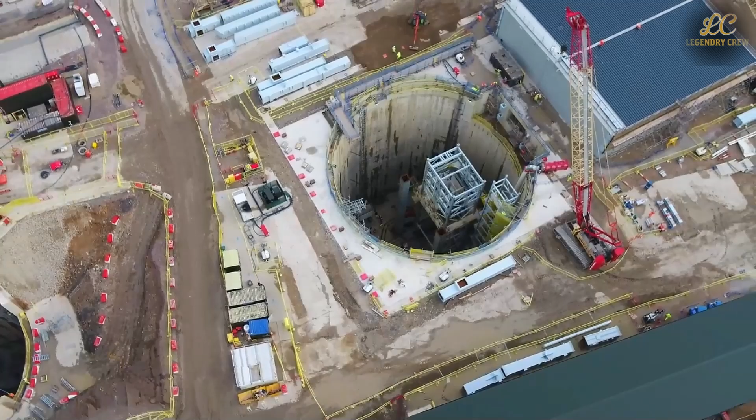Then, almost unnoticed by the public, a project appeared that promised to do something unfashionable but very concrete: dig something out of the ground and sell it to the world. Not shale gas, not lithium hype, not some speculative green miracle, but a mineral most people had never heard of, pulled from almost a mile beneath a national park.

The pitch was simple and deliberately dramatic. This single resource, polyhalite, could add the equivalent of roughly $130 billion to the British economy over the next half-century. That number was not whispered by activists or bloggers, but repeated by the companies and agencies backing the project. It was framed as a quiet economic reset, a long-duration export engine, and a rare example of Britain still playing the heavy industry game on a global scale.

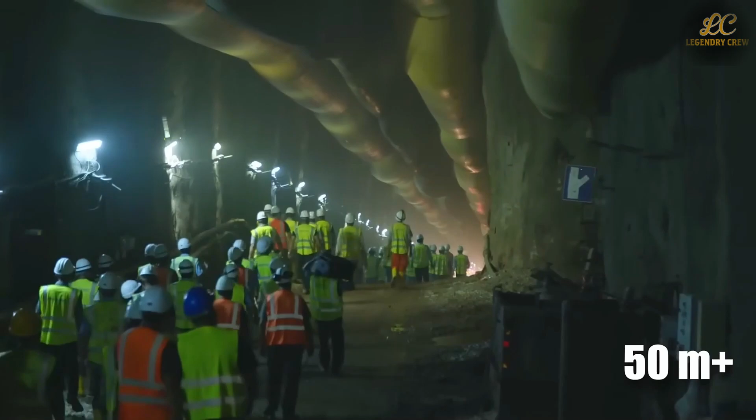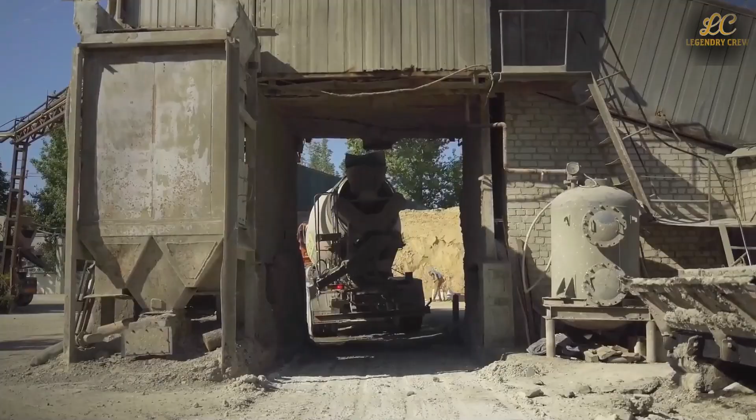The twist was that almost no one could see it happening. Drive through the countryside near Whitby in North Yorkshire, and you would not pass steel towers, truck convoys, or the usual visual clutter of a major mine. Instead, you would see fields, hedgerows, and a few barn-like buildings that look as if they belong to a farming cooperative. That is the point.

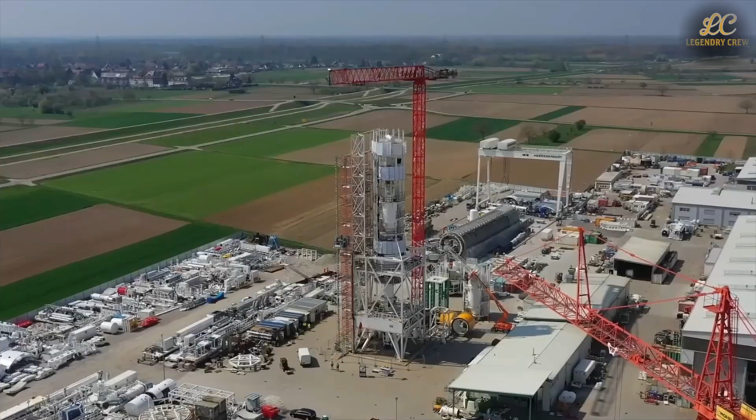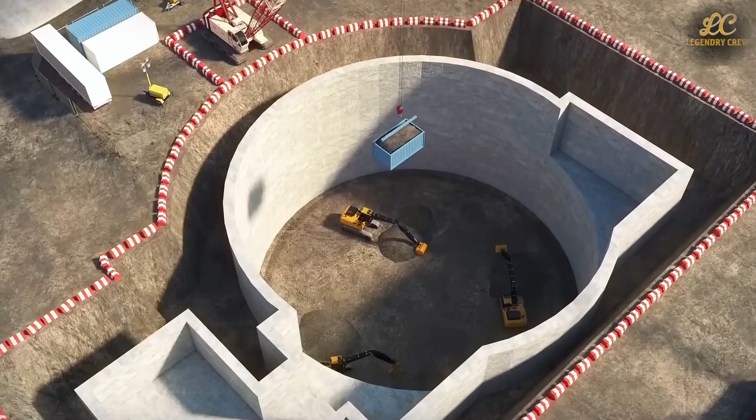The Woodsmith Project, as it is formally known, sits inside the North York Moors National Park, one of the most tightly protected landscapes in England. The deal with regulators and local communities was blunt. If you want to build a mine here, you hide it. Almost everything happens far below ground, deeper than any mine in Europe.

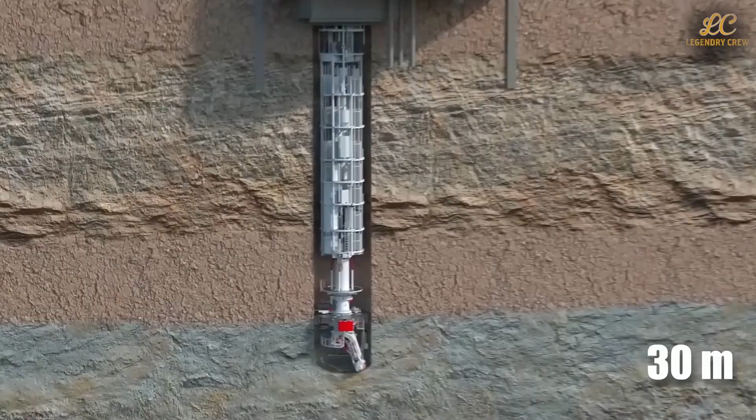This is where the narrative becomes deliberately provocative. Britain, a country often accused of exporting pollution while outsourcing production, is quietly building one of the deepest and most complex mines on the continent and marketing it as low impact. The infrastructure that usually signals extraction, the noise, the traffic, the concrete, has been pushed underground. The project's supporters call it responsible mining. Critics call it clever optics. Both can be true.

At the center of the story is polyhalite itself. Unlike oil or gas, it does not promise quick profits or geopolitical leverage. It promises something less glamorous, but more stable: fertilizer. In a world where food security and agricultural inputs are under constant pressure, that alone is enough to get policymakers interested. The mineral contains potassium, sulfur, magnesium, calcium, and trace nutrients in a single naturally occurring package. It does not need chemical conversion to be useful. Crush it, granulate it, ship it.

That simplicity is repeatedly emphasized because it underpins the project's main selling points: lower processing emissions and a product that fits neatly into the growing market for natural inputs. From the start, the Woodsmith mine was framed not as a local curiosity, but as a long-term national asset. Its backers talked about 50-year horizons, global markets, and steady export flows rather than boom and bust cycles.

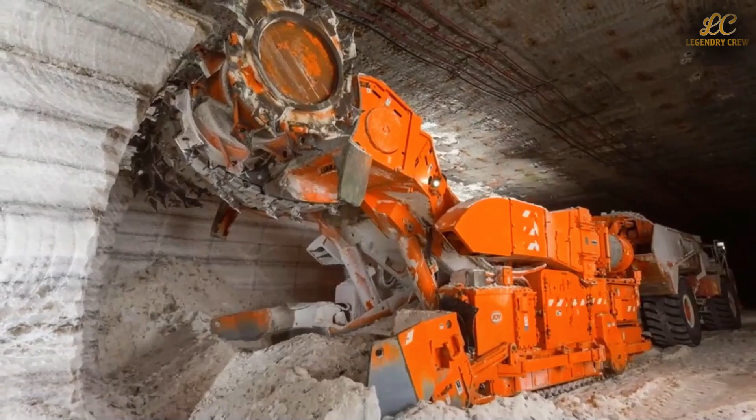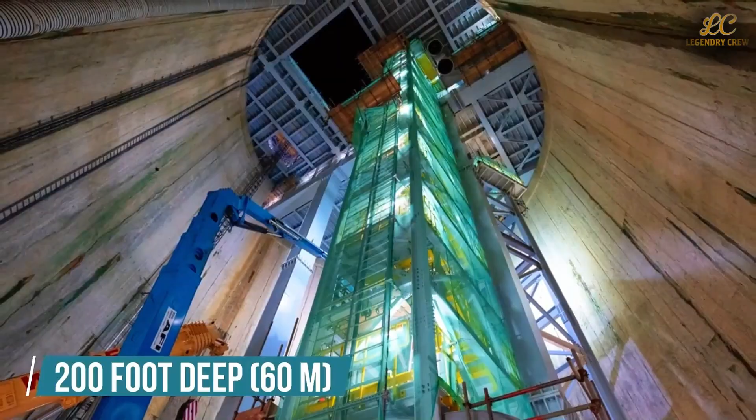The implication was clear. Britain might argue endlessly about services versus manufacturing, but here was a reminder that geology still matters. Sometimes, the most disruptive economic story is not a new app or financial instrument, but a hole drilled deep enough to change what a country sells to the rest of the world.

Polyhalite sounds obscure because, until recently, it was. For decades, global fertilizer markets revolved around a familiar trio: nitrogen, phosphorus, and potassium, usually processed through energy-intensive chemical routes. Polyhalite does not fit neatly into that model. It is a naturally occurring evaporite mineral that already contains potassium, sulfur, magnesium, calcium, and multiple micronutrients in one crystal structure. There is no need to synthesize or chemically recombine its components. Once mined, it is crushed and granulated, then sold largely as is.

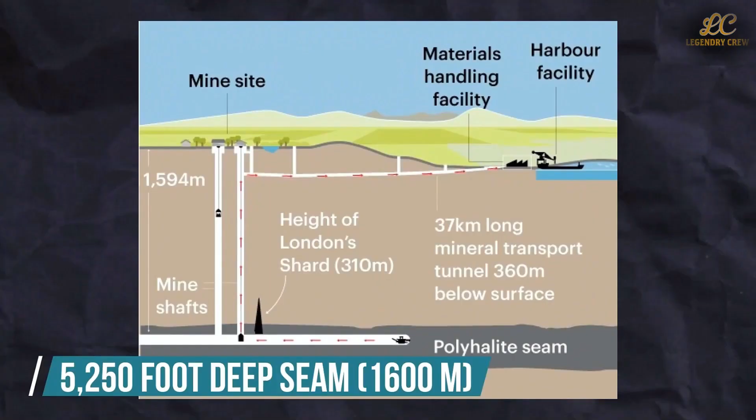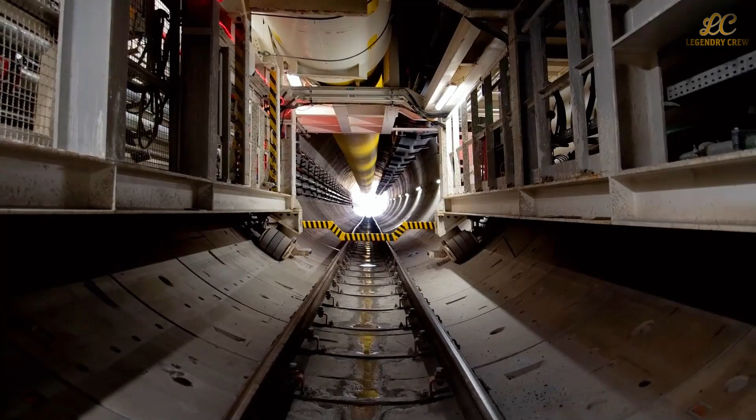That single fact explains most of the enthusiasm surrounding the Woodsmith project and also much of the skepticism. Supporters frame polyhalite as the anti-fertilizer fertilizer. Traditional products often depend on fossil fuels, especially natural gas, and leave behind soil damage over time. Polyhalite, they argue, feeds crops more slowly, improves soil structure, and avoids the chemical shock associated with conventional inputs. The marketing pitch goes even further.

Crops grown with it can, in many jurisdictions, be labeled as organic compatible. For farmers facing consumer pressure and regulatory scrutiny, that is not a minor detail. It is a potential pricing advantage.

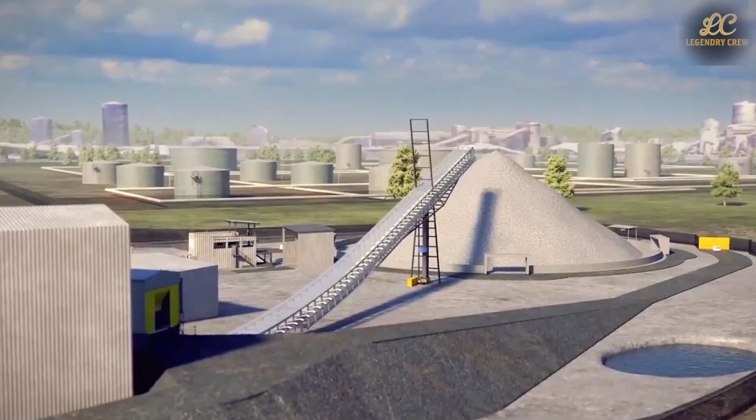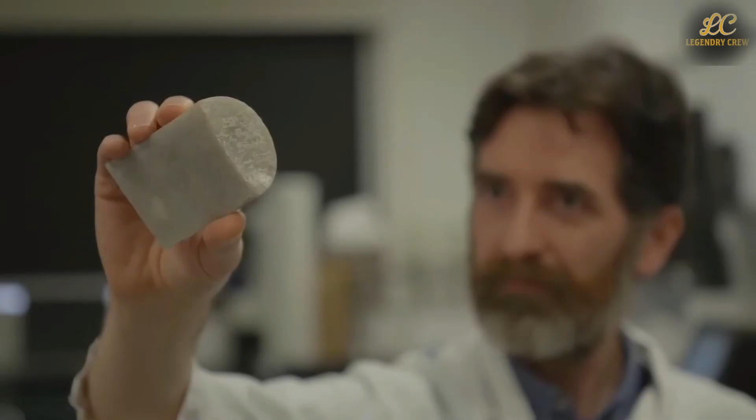Anglo American, the company now in charge of the project, brands its polyhalite product as Poly4. The name is blunt, almost industrial, and intentionally avoids green poetry. The message is that this is not a miracle substance, but a practical one. Same price range as standard fertilizers, fewer environmental headaches, and simpler logistics. In fertilizer markets, where margins are thin and volumes are massive, good enough and reliable often beats revolutionary. Still, the claims deserve scrutiny.

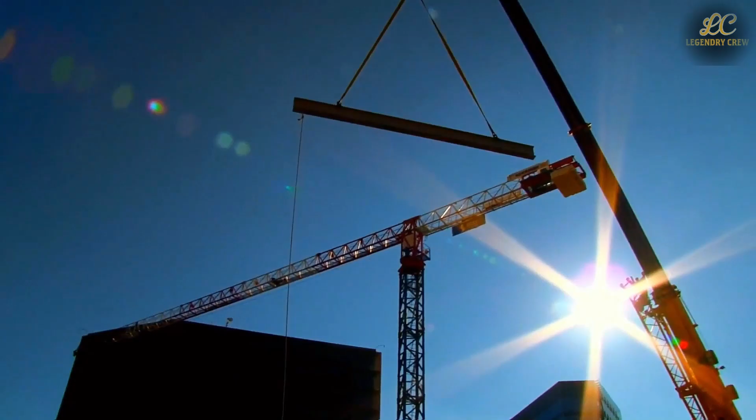Fertilizer demand is global, but it is also brutally competitive. Potash producers in Canada, Russia, and Belarus dominate supply chains, and farmers are famously conservative buyers. They do not switch inputs because of branding. They switch when yields, cost, and reliability line up.

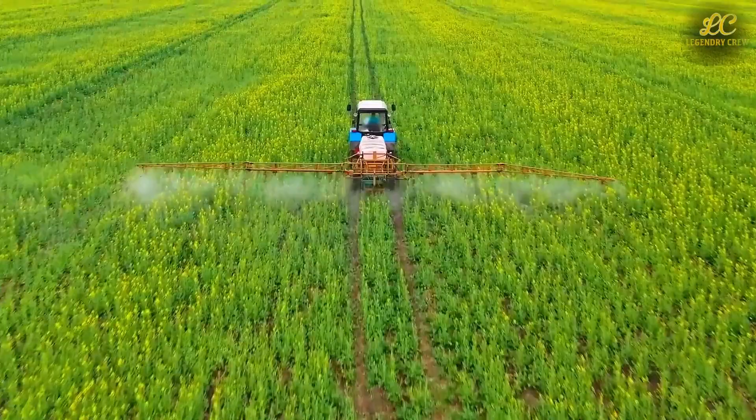Polyhalite has shown promising results in trials, particularly for high-value crops, but it is not a universal replacement. It works best as part of a nutrient mix, not a silver bullet. That nuance rarely makes headlines, but it matters for long-term adoption.

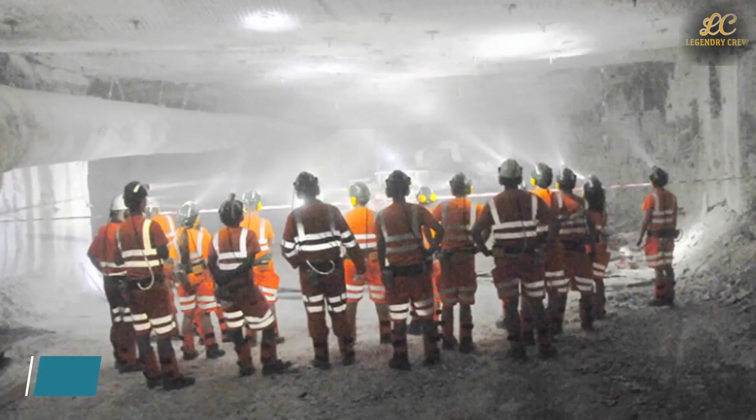This is where the Woodsmith narrative becomes more strategic than scientific. The project is not betting on polyhalite replacing existing fertilizers overnight. It is betting on incremental substitution at scale. Even capturing a small percentage of global fertilizer demand translates into millions of tons per year. For a mine designed to operate for generations, that slow burn is not a flaw. It is the plan.

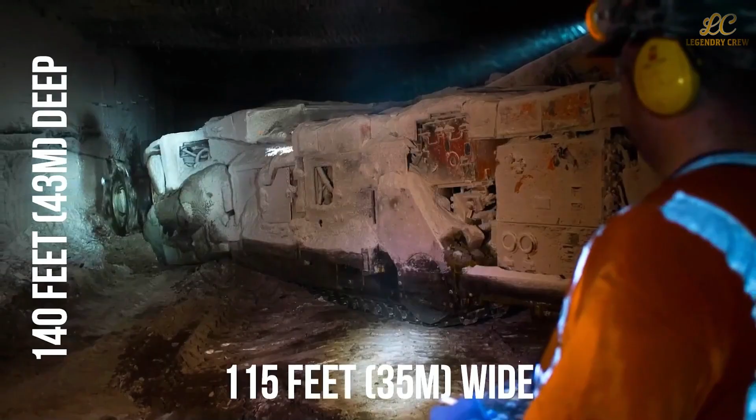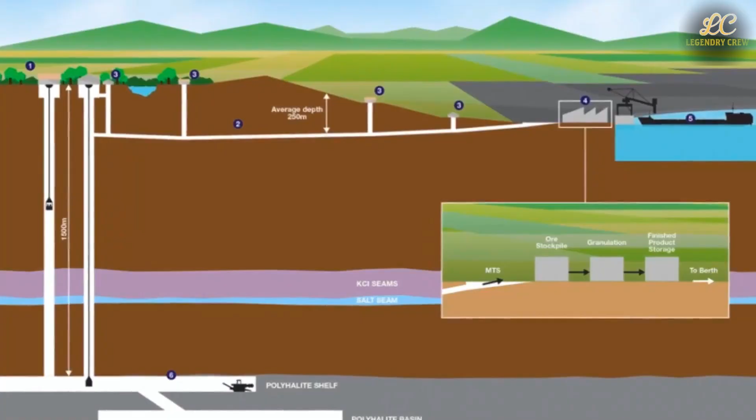There is also a geopolitical undertone that rarely gets stated directly. Fertilizer markets are sensitive to sanctions, wars, and trade disruptions. Recent years have reminded governments that food supply chains are not immune to politics. A large, stable, domestically controlled source of multi-nutrient fertilizer fits neatly into the language of resilience and strategic autonomy. Britain may no longer talk about empire, but it still understands leverage when it sees it.

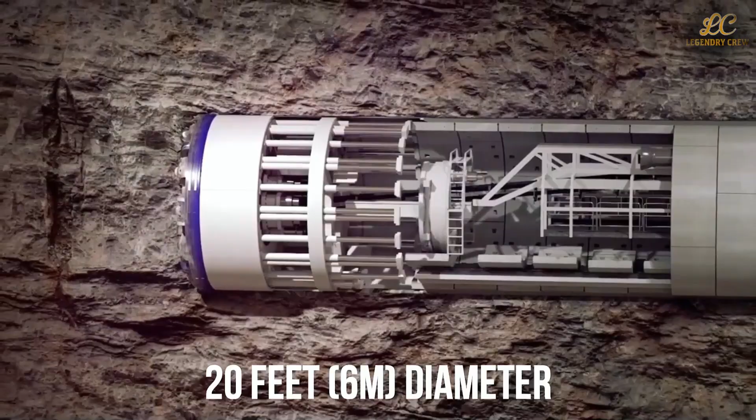The irony is that this leverage comes from a mineral most people cannot pronounce and will never see. Polyhalite will not change consumer behavior or inspire environmental movements. Its impact, if it works, will be quieter. Slightly better soils, slightly more predictable harvests, and a steady stream of bulk ships leaving a northern English port. That is not a glamorous future, but for an industry built on margins and reliability, it is exactly the kind that lasts.

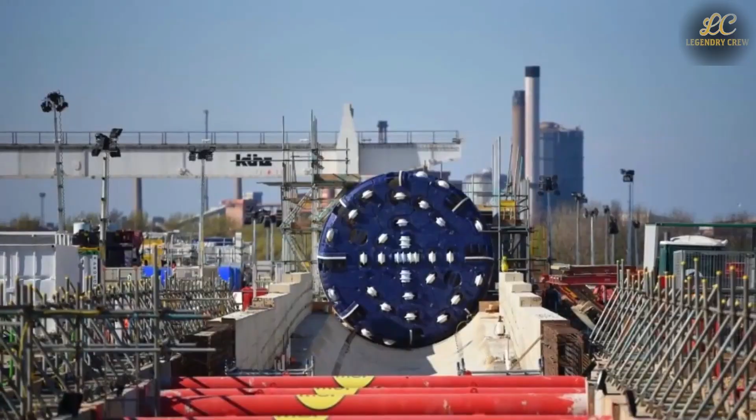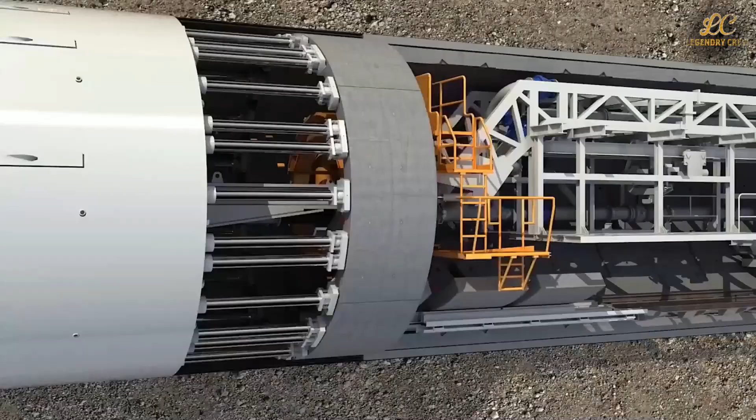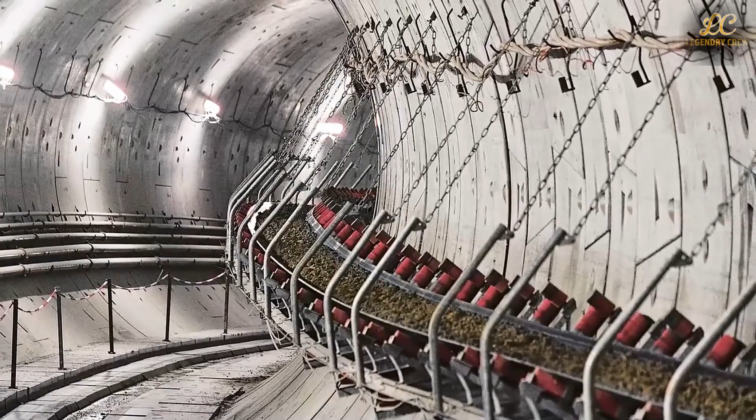What ultimately makes Woodsmith more than a clever sustainability story is the sheer scale of what sits underground. According to published resource and reserve estimates, the polyhalite seam beneath North Yorkshire is measured in the billions of tons, with a thickness of roughly 70 meters and lateral continuity that mining companies describe as unusually consistent. This is not a narrow vein that demands constant geological guesswork. It is a broad, predictable layer formed when an ancient sea retreated hundreds of millions of years ago, leaving behind mineral deposits that today look almost engineered for modern extraction.

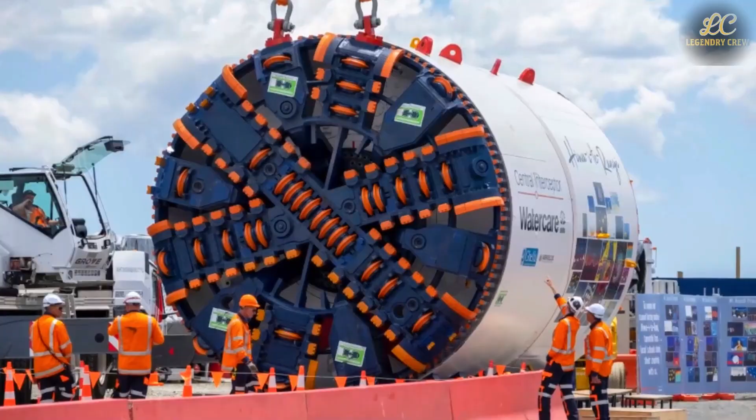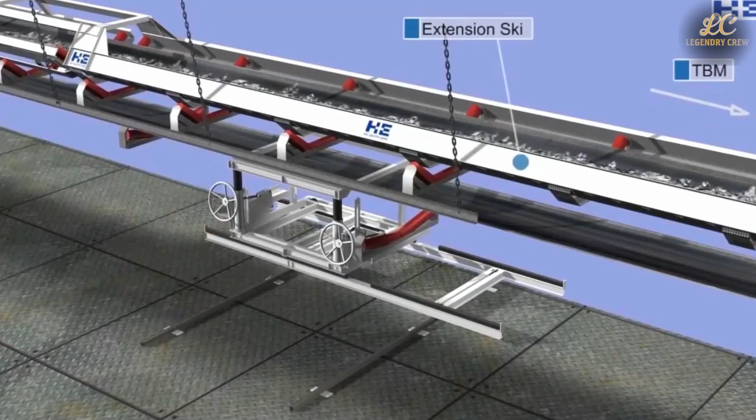For analysts, those numbers are the real headline. A resource base counted in multiple billions of tons translates into mine life measured not in decades, but in generations. Company filings and technical presentations consistently point to operating horizons approaching a century. That matters because it changes the investment logic. A project like this is not built to chase a commodity cycle. It is built to survive several of them. When management talks about long-term value, this is what they mean in practice.

The quality of the deposit strengthens that argument. Independent testing and company disclosures put the purity of the polyhalite at close to 90%. In mining terms, that is unusually high for a bulk mineral. High purity reduces processing complexity, lowers waste, and cuts operating costs over time. It also underpins the claim that the product can be marketed as lower carbon compared to fertilizers that require extensive chemical transformation. Again, this is not a moral argument. It is a cost structure argument dressed in environmental language.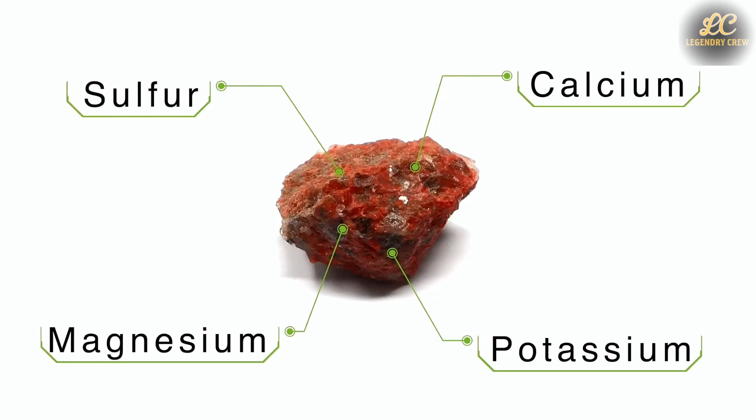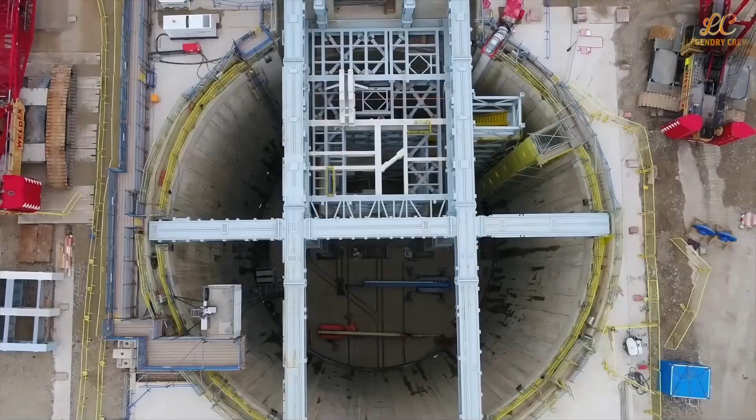The scale also explains why the project keeps being described as Tier 1. In industry shorthand, that label is reserved for assets that combine size, longevity, and competitive position. Woodsmith checks all three boxes on paper. The size is there, the longevity is clear, the competitive position depends on execution and markets.

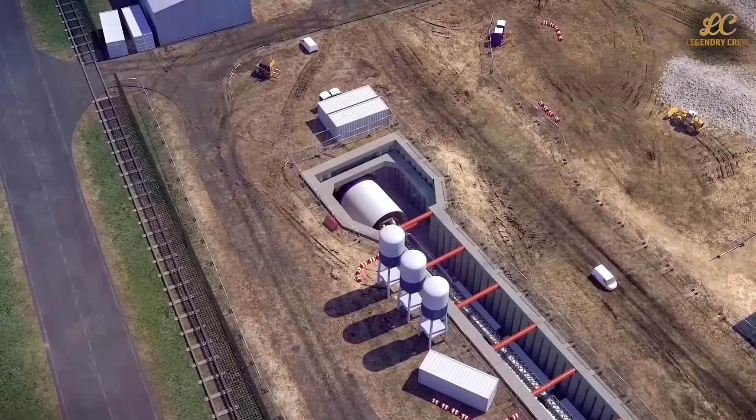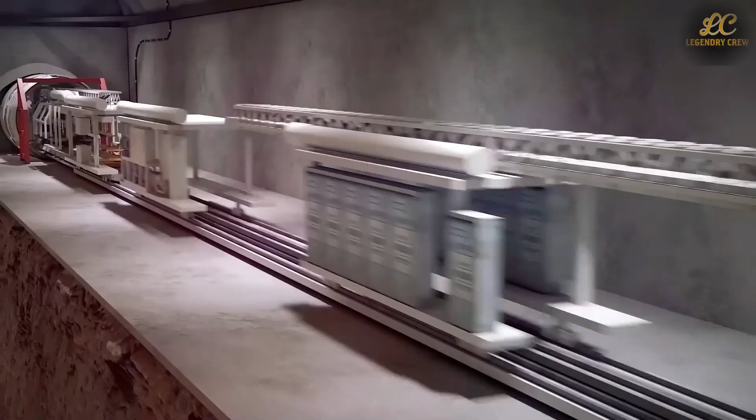But the geological fundamentals are difficult to dismiss. There are no other known deposits of polyhalite on this scale currently being mined anywhere in the world. That exclusivity alone attracts attention from investors who normally ignore fertilizer projects. Still, size cuts both ways. A deposit this large demands equally large infrastructure, equally patient capital, and an equally long tolerance for delays.

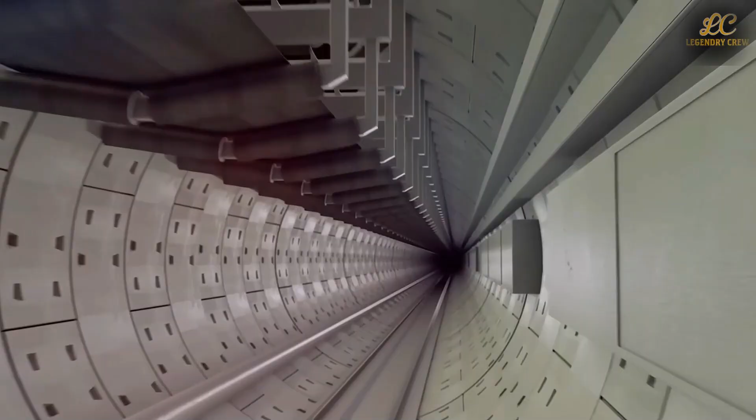Unlike smaller mines, Woodsmith cannot quietly scale back if markets soften. The tunnels, shafts, and processing systems are built for volume. If demand disappoints, the fixed costs do not disappear. This is the structural risk embedded in every megaproject, and it is not unique to Britain.

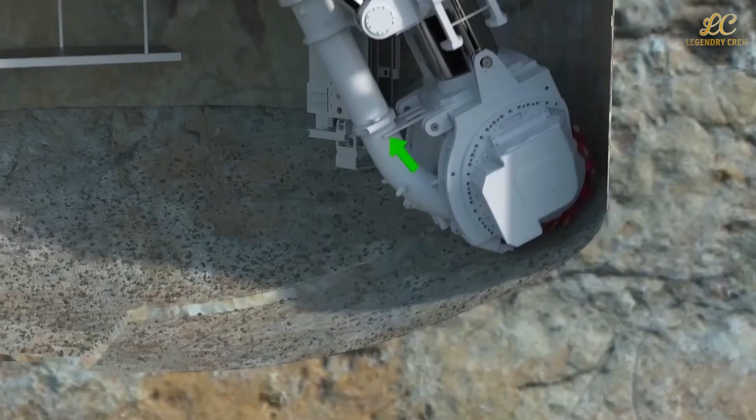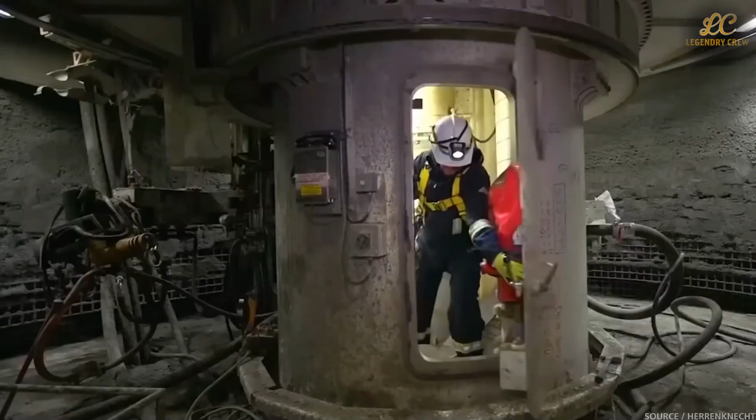What makes Woodsmith distinctive is where it sits in the national conversation. Britain is not known for betting on geology anymore. It is known for betting on finance, property, and services. A multi-billion-dollar mining project forces a different mindset.

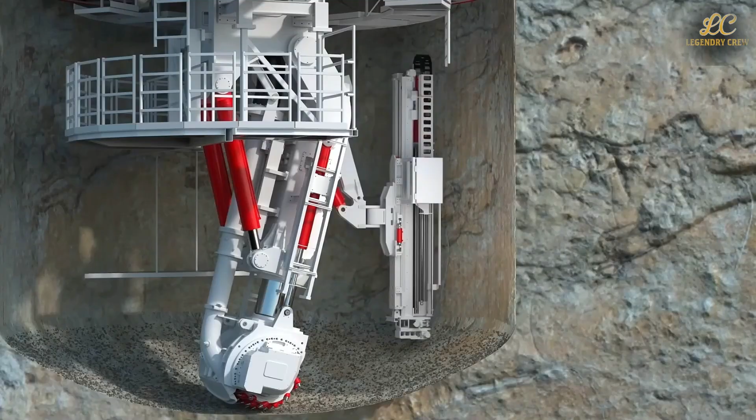It asks whether the country is willing to commit to slow, capital-heavy industries that do not fit neatly into quarterly narratives. In that sense, the polyhalite deposit is more than a mineral resource. It is a test of whether Britain still has the patience required to turn deep time into long-term economic value.

The phrase invisible mine is not a metaphor at Woodsmith. It is a design requirement. Because the project sits inside a protected national park, every visible element became a regulatory problem to solve, rather than a feature to showcase. The solution was architectural camouflage paired with extreme depth.

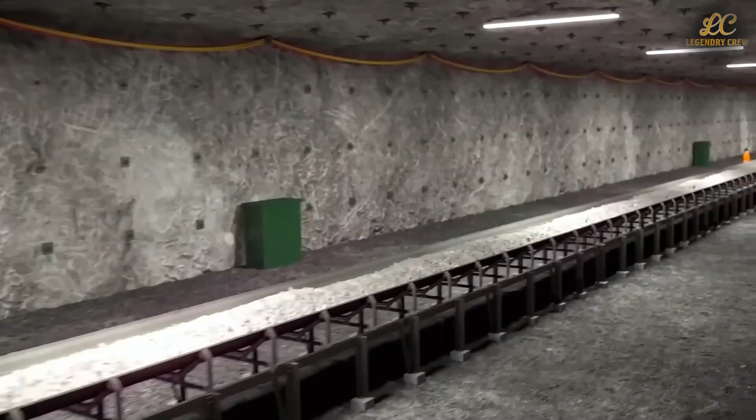Instead of headframes and processing plants rising above the landscape, the surface facilities were designed to look like agricultural barns, deliberately low profile and surrounded by existing woodland. From a distance, they blend into a landscape already shaped by farming rather than industry. Most of the action happens far below.

The main shafts plunge to depths of around 1.5 kilometers, well beyond the reach of normal sight and sound. Workers, equipment, and eventually mineral all move vertically through these shafts, sealed off from the surface. There are no open pits, no waste rock piles, and no fleets of trucks rumbling through nearby villages.

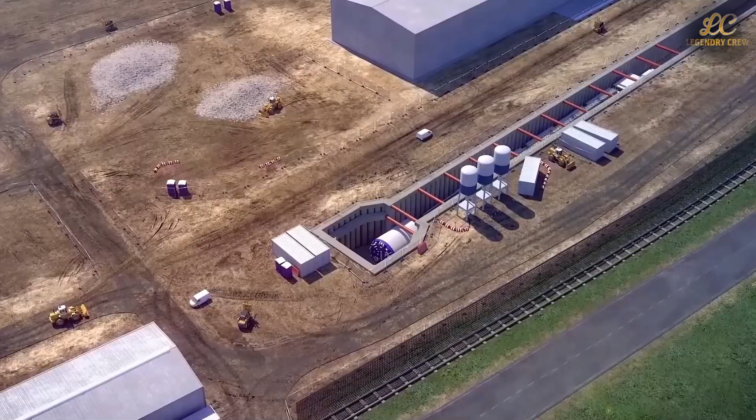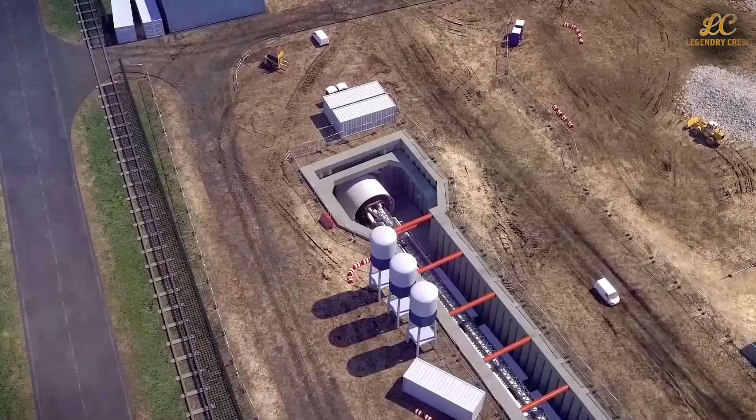For regulators and local communities, this mattered. The promise was not just reduced visual impact, but reduced daily disruption. This approach is often presented as a triumph of modern, responsible mining. There is some truth to that. By pushing infrastructure underground, the project minimizes land take and preserves surface ecosystems.

It also avoids a political headache. Open confrontation with environmental groups would have delayed the mine indefinitely. Designing it to be almost invisible was as much about social permission as it was about engineering. The company also backed this strategy with money. Tens of millions of pounds were committed to local investment, skills training, and community programs.

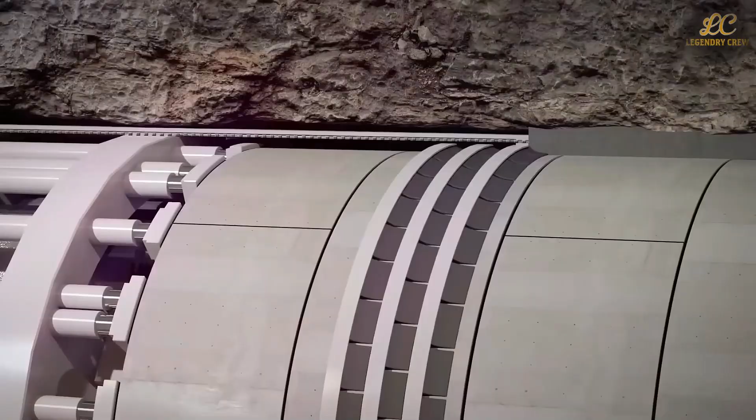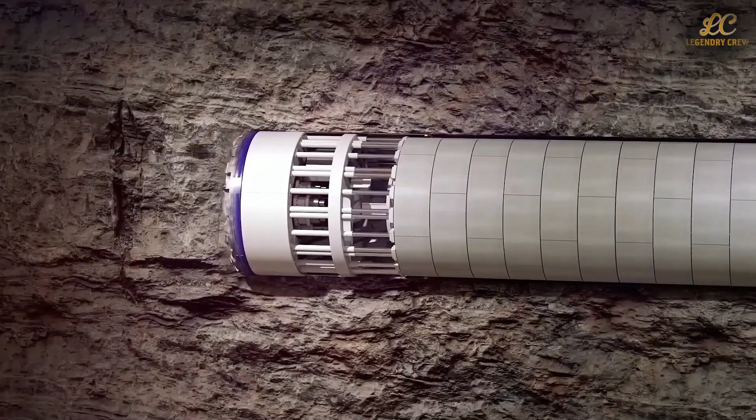A familiar pattern in modern resource projects. Critics dismiss this as the cost of buying goodwill. Supporters call it economic participation. Either way, it is part of the operating environment. Large mines no longer exist in isolation. They exist inside negotiated social contracts.

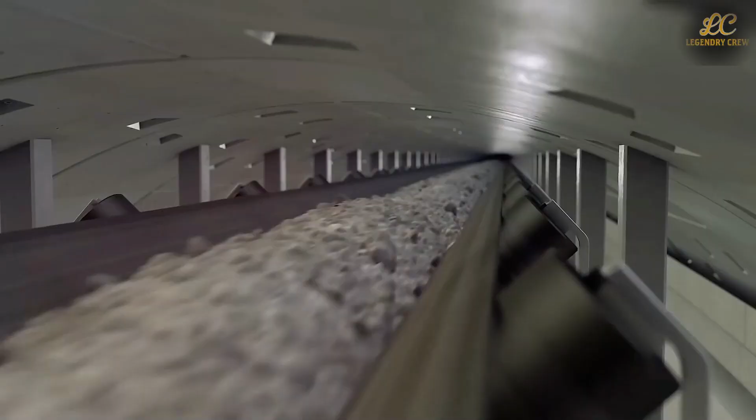Yet there is an uncomfortable question beneath the barn roofs. Does hiding industrial activity make it more acceptable, or simply easier to ignore? An invisible mine is still a mine. It still consumes energy, capital, and labor at scale. It still reshapes supply chains and local economies. The difference is that its footprint is psychological as much as physical. People who never see it rarely think about it.

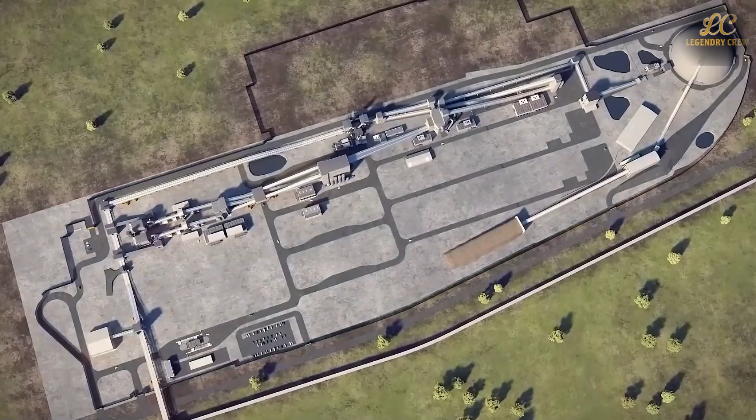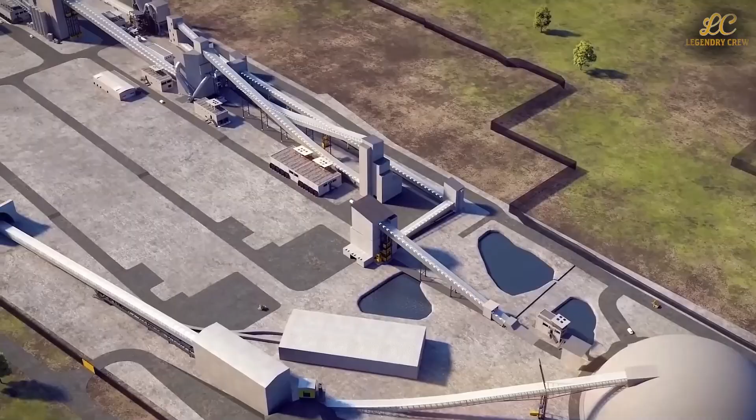This invisibility also shapes public debate. Without towering structures or obvious scars, the project avoids becoming a symbol. There are no viral images of destruction to rally against. But there are also no dramatic visuals to rally support. The mine exists in planning documents, technical reports, and investor presentations rather than in everyday life. That suits a project built on long timelines and quiet returns.

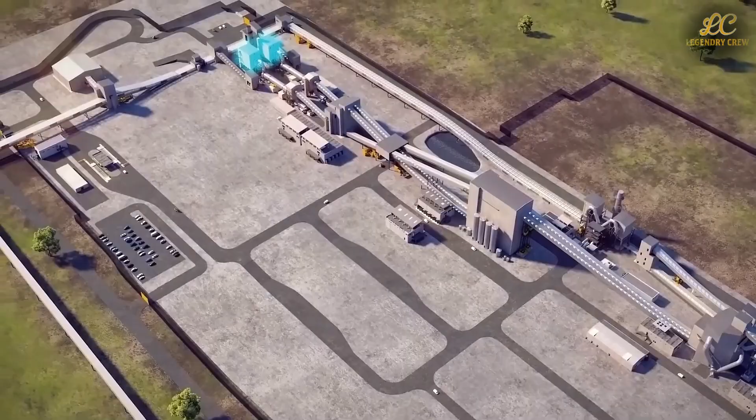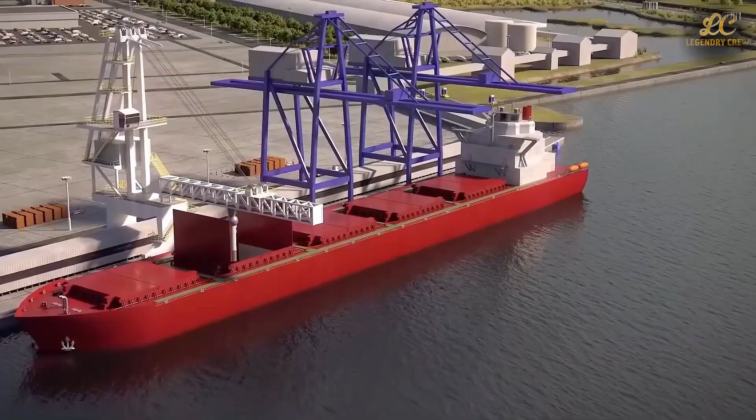In this sense, Woodsmith reflects a broader trend in heavy industry. Modern projects aim to reduce friction, not just emissions. They design out conflict by design. Whether this represents progress or simply smarter politics depends on perspective. What is clear is that the invisibility of Woodsmith is not an accident. It is a calculated response to a country that wants the economic benefits of extraction without the visible reminder of what extraction looks like. If the surface of Woodsmith is about discretion, the underground is about brute precision.

Two main shafts form the backbone of the operation, each sinking to depths of roughly 1.5 kilometers. One is designed primarily for people and equipment, the other for the mineral itself. This separation is not cosmetic. It reflects the reality of modern deep mining, where efficiency and safety depend on tightly controlled vertical logistics rather than improvisation.

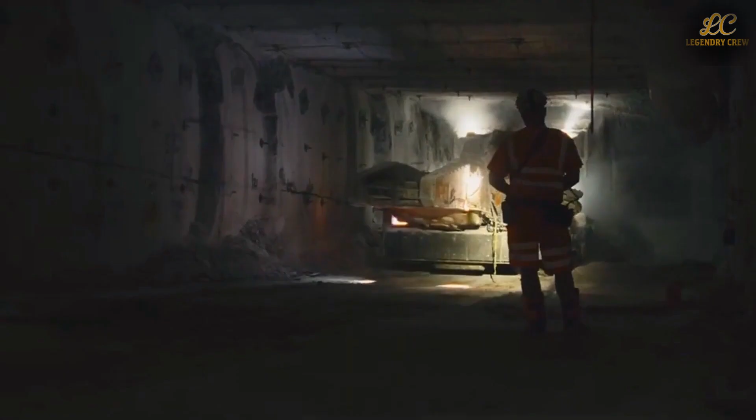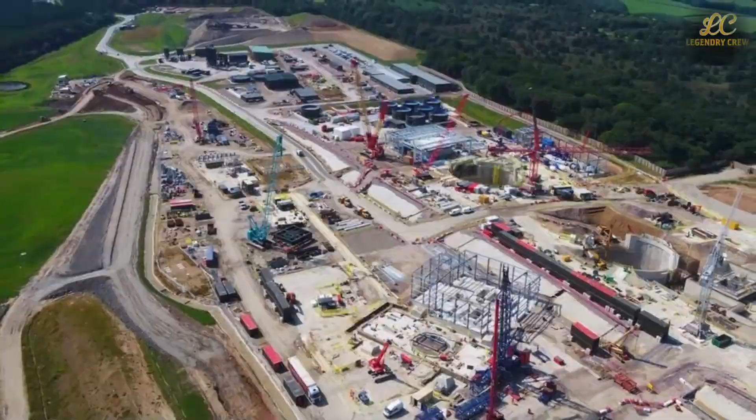Sinking shafts to this depth is not routine, even by global mining standards. The process relies on mechanized shaft boring systems rather than traditional drill and blast methods. These machines cut the rock in measured increments, lining the walls with reinforced concrete or steel as they descend. The goal is stability over speed. At these depths, minor errors become expensive very quickly. The engineering challenge is not just reaching the seam, but keeping the shaft usable for decades under enormous geological pressure.

Once underground, the mine is expected to evolve into a vast network of tunnels and extraction panels spreading over thousands of square kilometers of subsurface area. Polyhalite is extracted using a combination of controlled blasting, mechanical cutting, and drilling. From there, the ore is transferred onto flexible conveyor systems that feed directly into the production shaft. Unlike older mines that rely heavily on haul trucks, Woodsmith is designed around continuous movement. The mineral moves almost constantly, reducing bottlenecks and labor intensity.

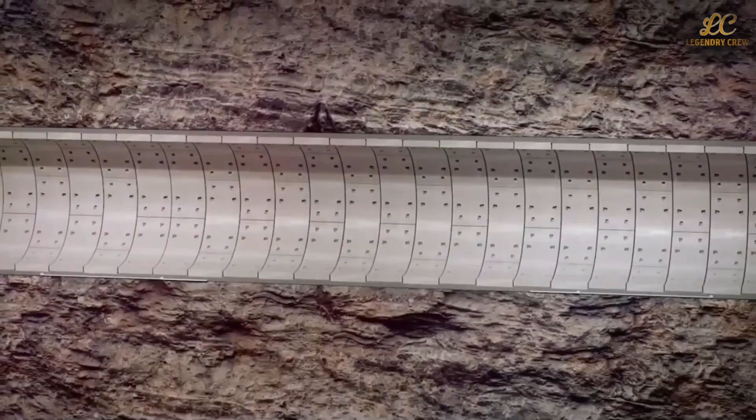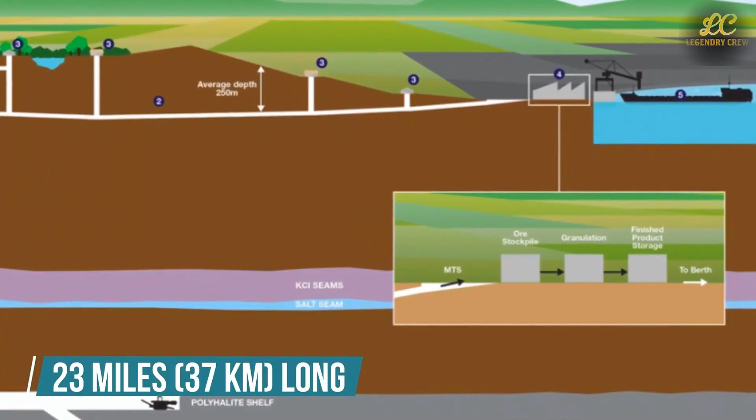At the top of the extraction shaft sits a hoisting system capable of lifting large volumes of material from extreme depth. This is where the mine's scale becomes unavoidable. The hoists, hidden inside barn-like buildings on the surface, are comparable in size and power to those found in the world's largest mining operations. Their job is simple to describe and difficult to execute: lift millions of tons of rock vertically, reliably, year after year.

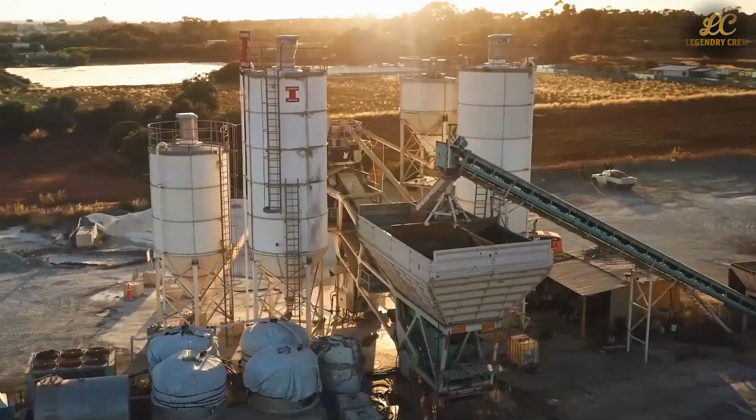The emphasis on automation and conveyors reflects a broader industry shift. Deep mines are no longer labor-heavy operations defined by hundreds of workers underground at any given time. They are capital-heavy systems optimized for consistency. Fewer people underground means lower risk and more predictable output. It also means higher upfront costs. The machines do not come cheap, and neither does maintaining them at depth.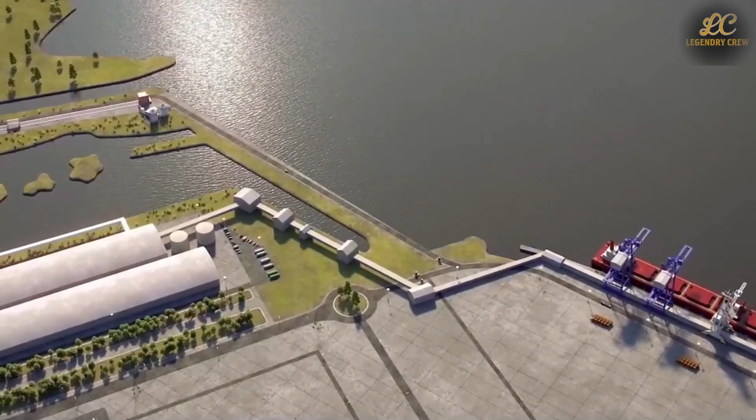This is where the Woodsmith project starts to look less like a green showcase and more like a traditional industrial gamble. The technology is proven, but the scale is unforgiving. Every shaft, every hoist, every conveyor must work as planned to justify the investment. There is little room for half measures. The mine cannot operate at small scale and gradually grow. It must function as a system, or not at all.

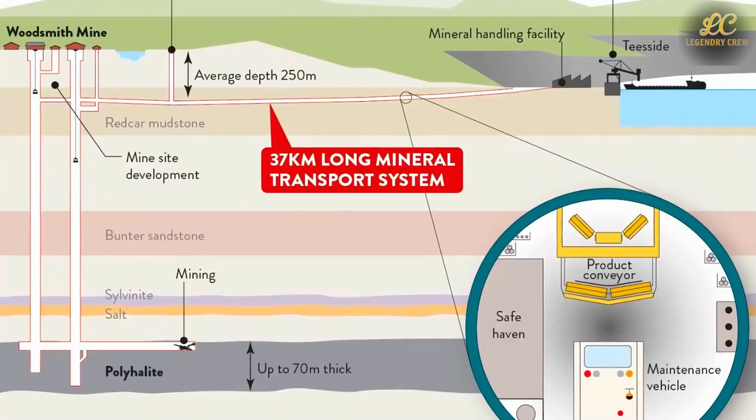In that sense, the engineering beneath North Yorkshire tells a more honest story than the barns above it. This is not about hiding industry. It is about committing to it fully, accepting the costs and risks that come with operating one of the deepest and most complex mines in Europe, and betting that long-term demand will reward that commitment.

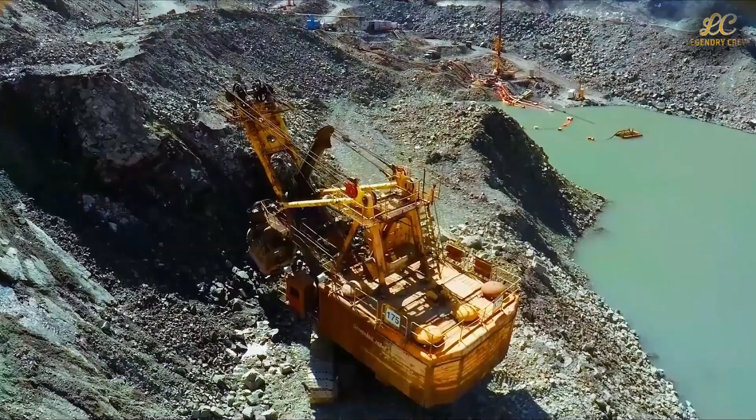The real spine of the Woodsmith project is not the shafts, but the tunnel that turns a remote mine into a global exporter. From the extraction shafts, the polyhalite does not move by truck or rail. It moves through a single underground artery: a concrete-lined tunnel stretching roughly 37 kilometers from the mine site to the processing facilities on Teesside. This tunnel is not a supporting feature. It is the business model.

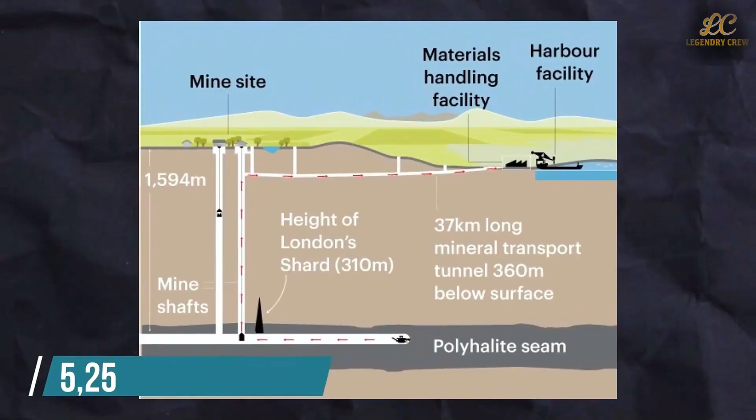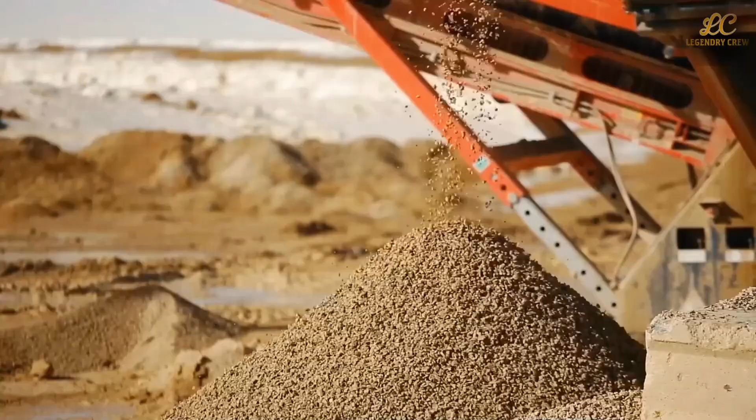At around 5 meters in diameter and buried hundreds of meters below ground, the tunnel houses what has been described as the longest continuous conveyor system in the United Kingdom. Its purpose is brutally efficient. Ore leaves the mine, enters the conveyor, and travels directly to the materials handling facility without ever touching the surface. No trucks, no road congestion, no visible emissions. For a project operating inside a national park, this was not optional. It was the only politically survivable option.

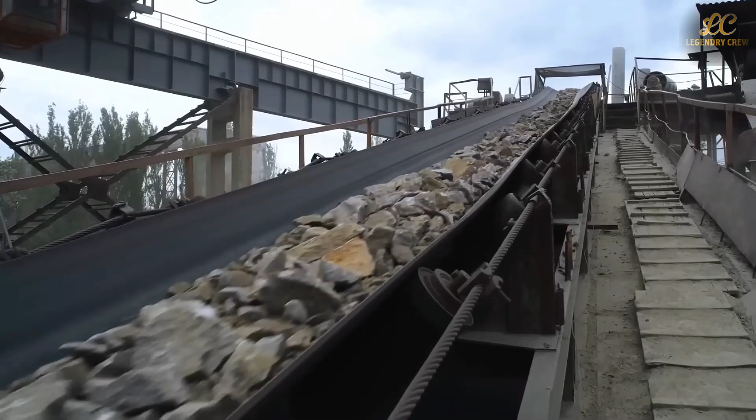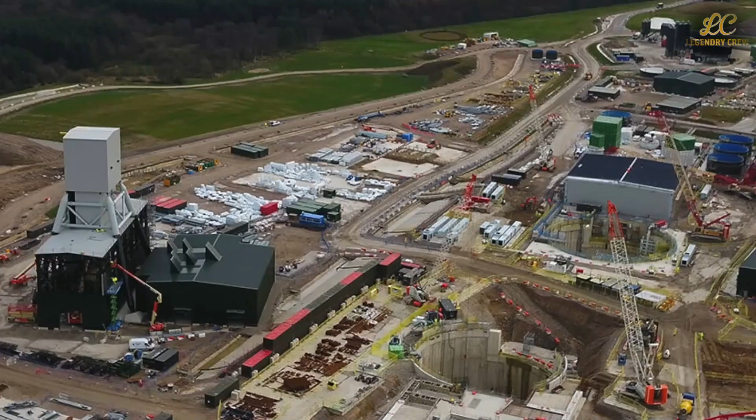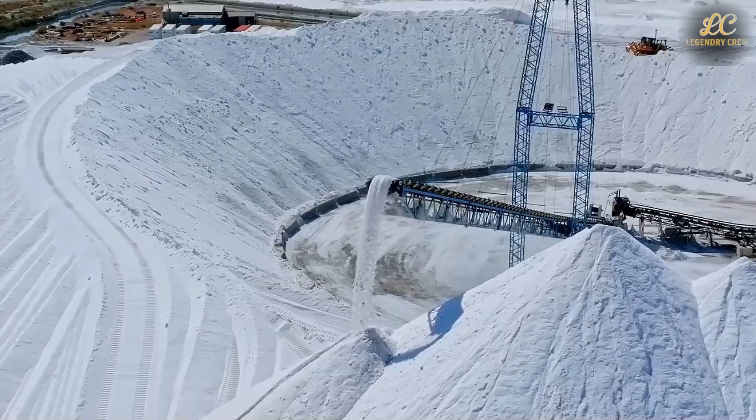Recent construction updates show why this tunnel keeps drawing attention in engineering circles. Tunnel boring machines weighing roughly 2,000 tons each were deployed from multiple access points, advancing at an average rate of about 20 meters per day. By late 2024, the excavation had passed the 30-kilometer mark, placing the project among the longest mineral transport tunnels ever built in Europe. Each meter bored was immediately lined with prefabricated concrete segments, locking in structural integrity as the machines advanced. The cost reflects the ambition.

The tunnel alone carries a price tag measured in multiple billions of dollars, making it one of the most expensive single pieces of infrastructure in the entire project. Supporters argue that this cost is justified because it eliminates decades of surface transport expenses and environmental conflicts. Critics respond that it concentrates risk. If the tunnel fails or underperforms, the entire mine feels it instantly.

At the far end of the tunnel sits the Wilton Materials Handling Facility, where the polyhalite is crushed and granulated. There is no chemical processing stage. The ore's high natural purity allows it to move straight into final product form. From there, another enclosed conveyor system carries the fertilizer through a dedicated pipeline toward the port on the River Tees, where bulk ships can load directly for export.

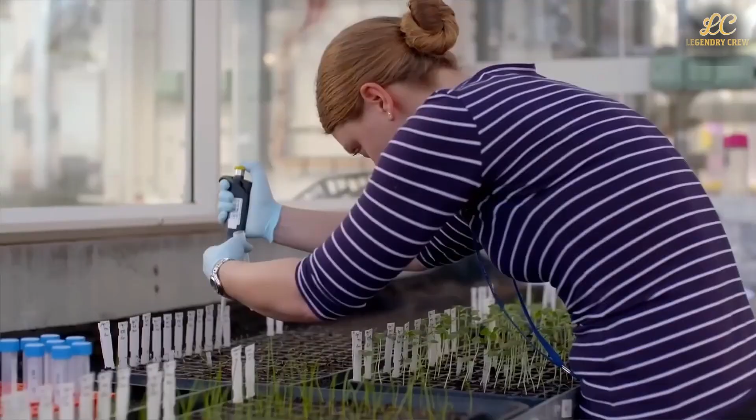This is where Woodsmith starts to look less like a mine and more like a logistics machine. The extraction, processing, and shipping stages are designed as one continuous flow. Break that flow, and output collapses. Maintain it, and the system can push millions of tons per year with relatively low operating friction. For Anglo-American, this design reflects a hard-earned lesson from global mining. Scale only works when logistics are invisible and relentless.

The tunnel is not glamorous, but it is the reason the project exists at all. Without it, the mine would be trapped by geography and regulation. With it, a hidden deposit under a national park becomes a permanent fixture in global fertilizer markets.

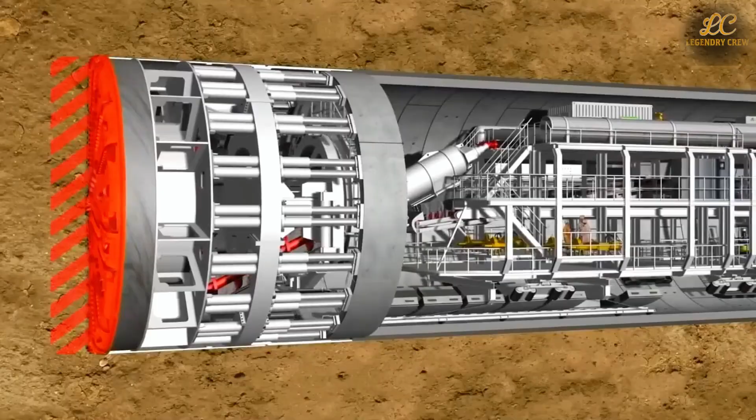By the time the Woodsmith project reaches full operation, it will no longer make sense to describe it as a hidden curiosity. On paper, the mine is designed for annual output measured in the tens of millions of tons, with internal planning scenarios clustering around the low double-digit million range per year once the system is fully ramped up. That level of production places it firmly among the most significant fertilizer-related mining projects in the world, not because of novelty, but because of endurance.

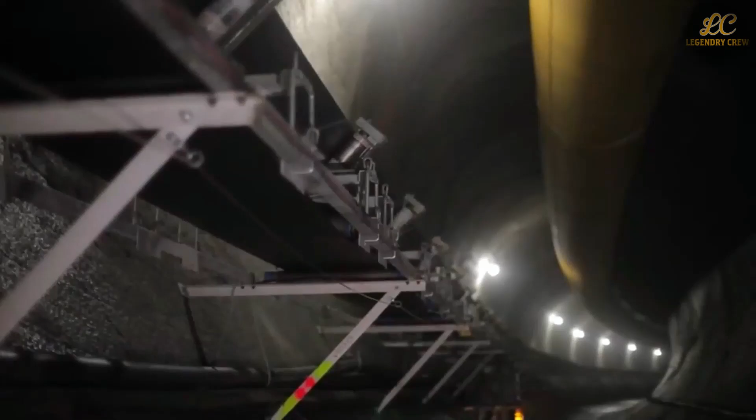Anglo-American's own messaging over the past 2 years has become noticeably more cautious and more revealing at the same time. The company has slowed capital spending, stretched timelines, and emphasized disciplined execution rather than rapid scale-up. This is not a sign of retreat. It is an admission of reality. Projects of this size do not fail because the geology is wrong. They fail because costs outrun patience, markets shift, or financing assumptions crack under pressure. The decision to phase investment and delay final ramp-up is a hedge against exactly those risks.

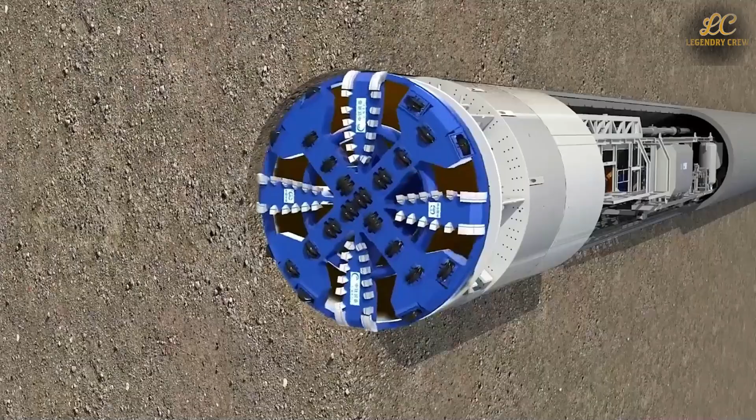The economics are straightforward but unforgiving. The mine requires sustained global demand for multi-nutrient fertilizer, stable shipping routes, and pricing that supports a capital base running into the many billions of dollars. In return, it offers long-term supply security, predictable output, and a product positioned as lower carbon compared to chemically intensive alternatives. This is not a growth stock story. It is an infrastructure story disguised as a mining project.

There is also a political dimension that deserves attention. Britain often speaks about strategic resilience, supply chain independence, and green transition, yet rarely commits to projects that test those slogans over multiple decades. Woodsmith does exactly that. It locks the country into a long-term industrial path that cannot be unwound quietly. Once the tunnel, shafts, and port logistics are fully operational, walking away is not an option. That commitment cuts both ways. It can anchor regional employment and exports, or it can become a reminder of how expensive long-term bets can be when assumptions change.

What makes Woodsmith unusual is not just its depth or invisibility, but its timing. It is being built in an era obsessed with speed, software, and short returns. This project offers none of that. It offers slow extraction, heavy capital, and payoff measured in decades. In a sense, it is almost an act of defiance against modern economic impatience.

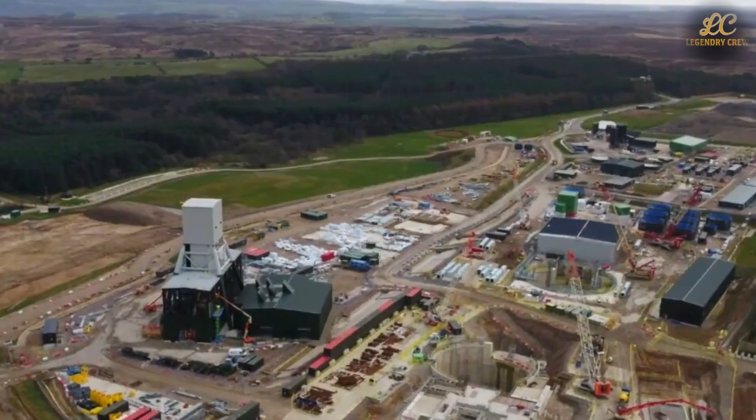Whether this mine becomes a quiet success story or an uncomfortable lesson will depend less on engineering and more on discipline. The geology is generous. The technology is proven. The remaining variable is execution in a world that rarely rewards waiting. Britain is betting that this time, waiting will pay.